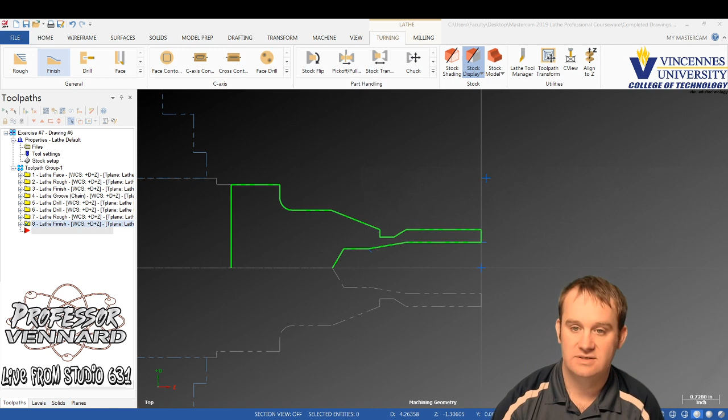Okay, so what you will have a lot of times is like this part, we've made it. We left all those outside corners sharp, and then I went back to my print, and this particular print doesn't actually say it on it, but let's say your print says break all corners. Any sharp corners need to have a 50 thou radius on them. So instead of having to go through and re-toolpath everything, we can actually just adjust some of the toolpath parameters to make it automatically do this for us. That's what we're going to do now, so let's go ahead and get started.

Okay. So what I'm going to do is I'm going to go into my lathe finish toolpath here. Okay. And I'm going to go into the parameters. Okay, actually I'll tell you what I want to do first. I want to move this toolpath. I want the groove to get done before the finish path. That way it can put a groove, or it'll break this corner right here for us.

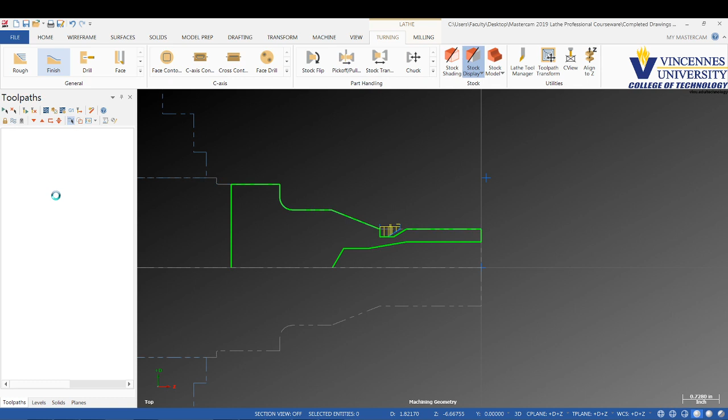So I'm going to move my arrow up here, and I'm going to move that before. So there, you saw what I did there. I held down my right mouse button, I drug that up, and I moved it before. I could have also done the Control X to cut it, moved my arrow and pasted it, but that's what we did there. Let's go ahead and regenerate this real quick. That way they're all regenerated. And now we're going to go into our lathe finish path.

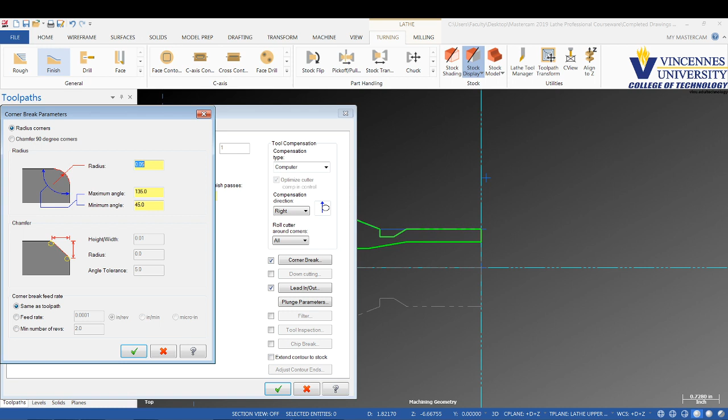I'm going to go into my plunge parameters, and I'm going to allow plunging in both directions. Okay, we're going to do that. Alright, and then once we have done that, we're going to come down and we're going to turn on corner break. Okay, and basically what we're going to do is in the corner break we're going to tell it to put a radius of 50 thou on all sharp corners. Okay, little check mark out. And now you see there, it radiused through there, radiused up here. Okay, we've radiused all the corners.

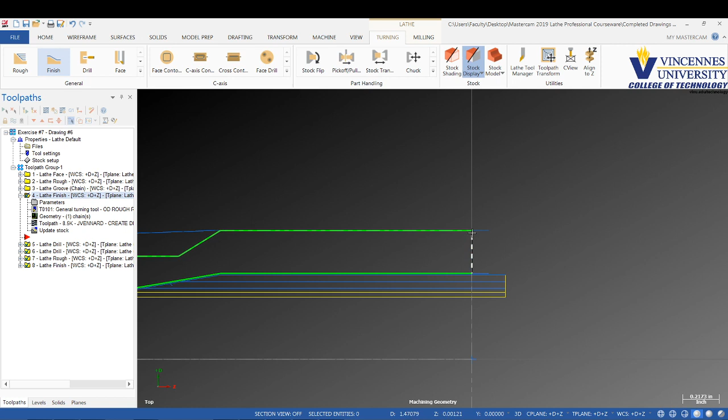Now, let's say we want it to do this front edge. Okay, we want it to do the front edge here. I don't want this. I want there to be a radius right here. I can do that easy. I can do that in my lead in, lead out. Okay, and when I come into the lead in, I'm going to turn on add line right here. Okay, and I'm going to tell it a length of 0.1 and the angle. Okay, that's what I know from basically from the start point.

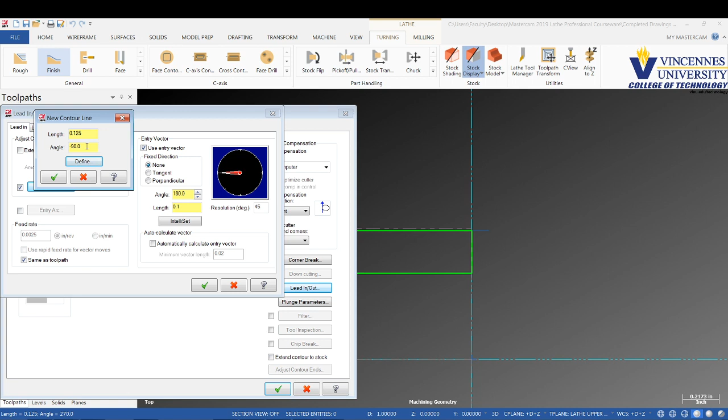Where do I want this? This on my lead in. So I'm going to tell it to add like 125 thousandths. Oops, in at 270 degrees. Sorry, I could have also come out here and picked this line here. Okay. So negative 90 is the same as 270 degrees. So it pulled in negative 90, but the same thing. We check mark now.

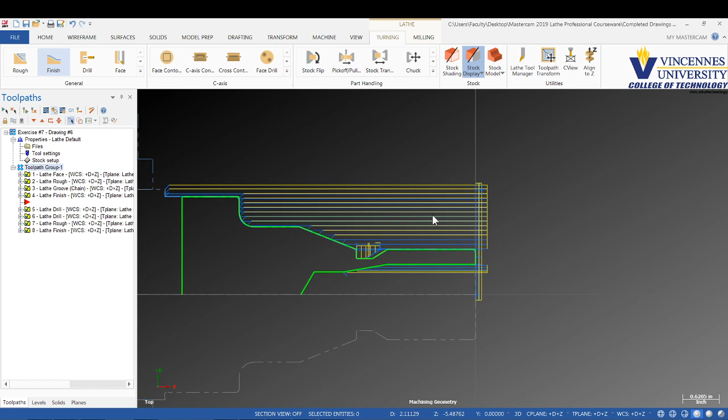We regenerate that. There, it added this on down here, and now you see it's radiused that corner. Okay, so that's one way to break all those sharp edges on that part. If we watch this now before we go and part it off. See, it just basically rounded all those, what would have been sharp corners, are now radiused.

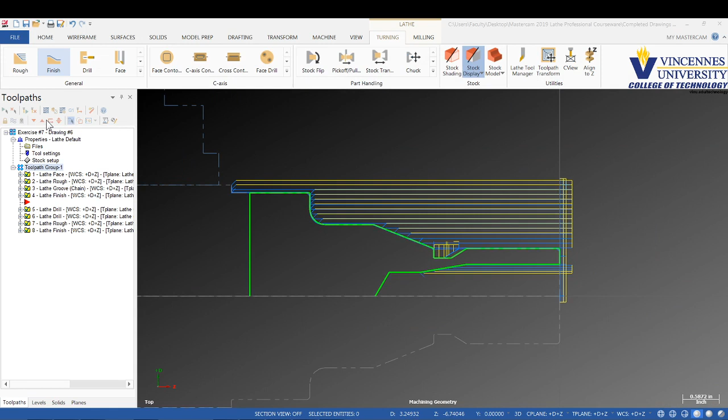Okay, so the last thing we've got to do is we've got to part this off. So let's move our place arrow to the bottom. Let's go up here and select cut off. Our boundary point is going to be the top back edge of the part right here. We'll try it with this grooving tool. I don't know if it's going to have enough reach or not. We'll find out here in just a second.

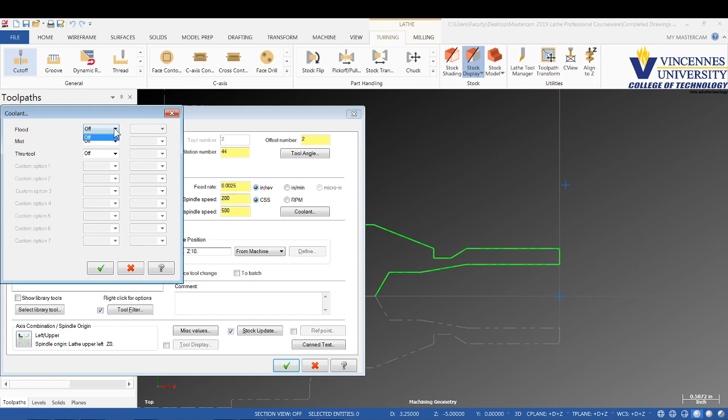Let's go ahead and drop our max spindle speed way down. Turn on our coolant. I'm going to say part off workpiece. Okay. We'll go to our cut parameters, and I'm going to turn on from stock on these. That's typically what I would do.

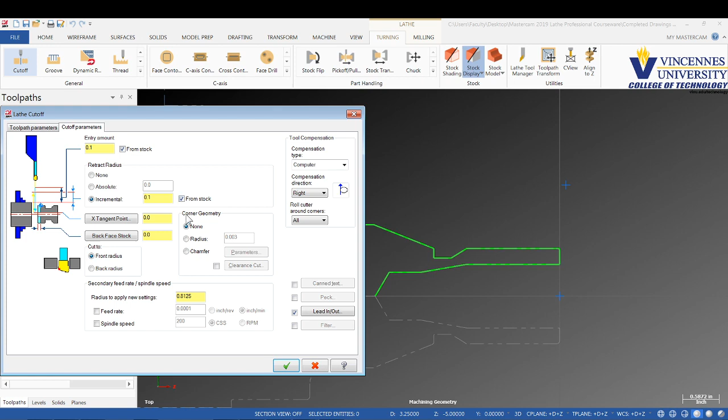And then I'm going to tell it on the X tangent point. Okay, this basically, I can tell it where I want it to stop at. I'm going to actually put a positive here. And what's that going to do? A positive 50 thousandths tangent point, that's basically going to leave like a 100 thou island in the middle, but it'll keep it from breaking off to where the part disappears in the verify when we go to watch it here in a second.

If I wanted to part all the way off and let it fall into a tub or a parts catcher or whatever, obviously I'd want to put in like a negative past the center line number here, but I want it to stay connected, so I'm going to put a positive 50 thou. And then I'm going to come into my corner geometry here. I'm going to turn on chamfer, and in the chamfer parameters I'm going to tell it that I want a chamfer of 50 thou, 45 degree angle. Should be good.

Okay, then we'll come down here just to look at this, and we'll talk about this just a little bit. So what this will do is I can tell it, hey, once you get down to a 1/4 inch, basically a 1/4 inch radius, I want you to slow down the spindle speed to 100 RPM. This basically is a way to keep it from throwing the part when you go to part off a part.

So for instance, I was working on a project here recently using the parts catcher on the lathe, and what I would have it do is when it'd get within like 50 thou of the actual part off, I'd have it slow all the way down to like 100 RPM, and that way it dropped the part in the parts catcher, not throw it because it parted off at an inopportune time in the lathe. So that's what this can be used for.

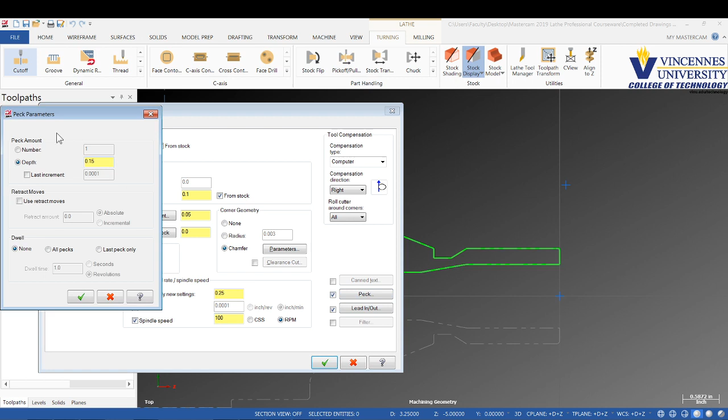All right, and let's go ahead and turn on pecking. Since we are going pretty deep here, I'm gonna tell it that every 150 thou, I want it to dwell for a revolution, kind of like a chip break. Okay, so for every 150 thou, I want it to dwell for 1 revolution. And we'll check this out.

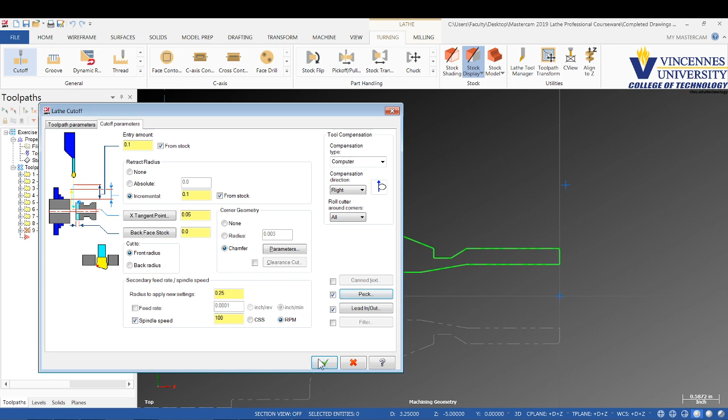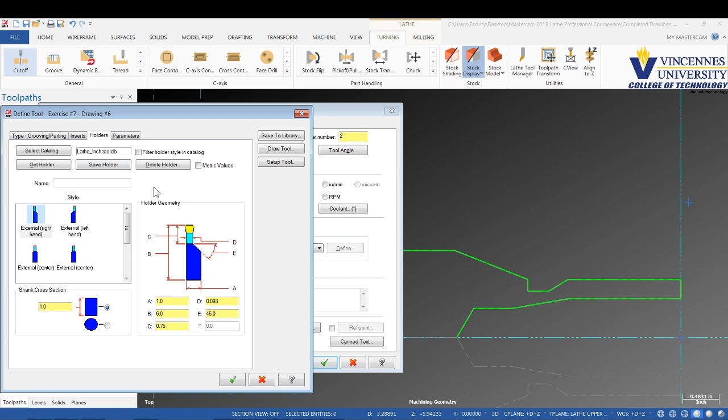All right, so I was talking about earlier that I wasn't sure if the tool was going to have enough clearance. Obviously, the way this parting tool is built, it's going to crash into the back of the part here. So I'm just going to go into this tool's parameters. Okay, and I'm going to adjust. See here, I'm going to tell it it's like 2 inches. I'm lying to it. I'm telling it that it's got a longer neck on it than what it does.

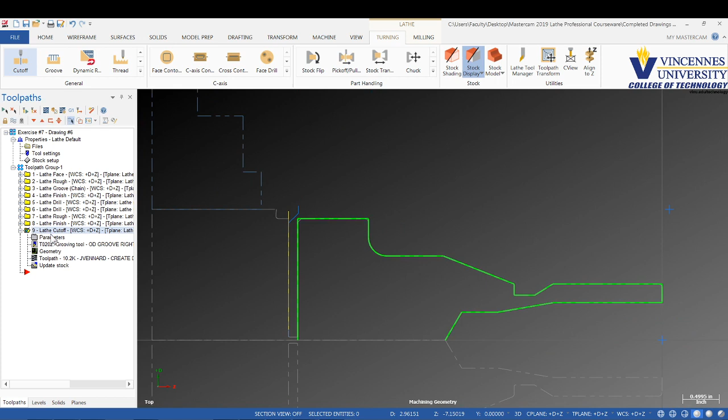And that way, well, we're still hitting a little bit there, huh? Just barely at the end. Got us just a little bit. So, we'd have to fix that if necessary. And that could be something as simple as needing a little clearance cut here. So we might need just a little bitty clearance cut to prevent... there we go. The clearance cut fixed that one for us. Just came in and did a little clearance, parted it off.

So there's the part. If there's any questions, feel free to email me, but that should complete this exercise.